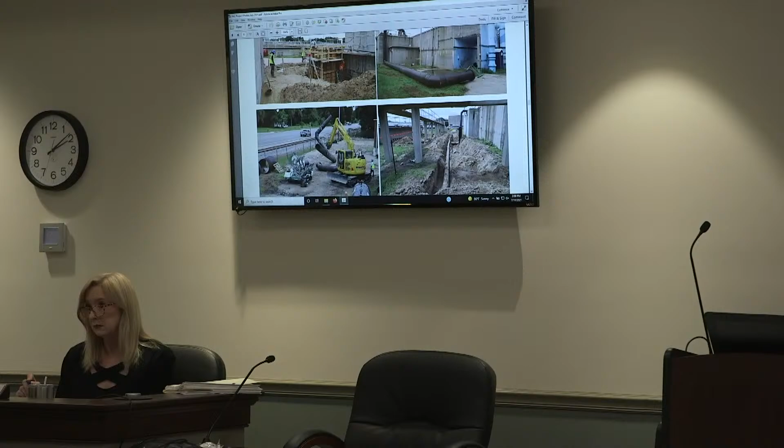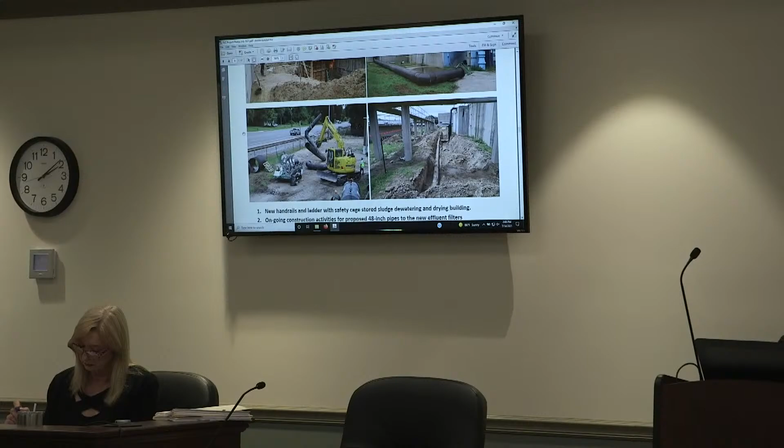They have started hooking up bypass. I haven't been down there this week, but they should be on bypass for the pre-aeration building this week. They're basically going to intersect - you see in that second picture on the right, there's some pipes going vertical, there's the pumped influent water. They're going to disconnect those pipes and tie them into the HDPE and bypass that structure so they can begin demolition. They unfortunately had to pull the plug on the influent sections done in advance of the storm, so they've got to go back and plug those new sections so they can come back and coat those manholes that were installed and do a little cleaning. But we wanted to make sure everything was as open as it could be for the storm event.

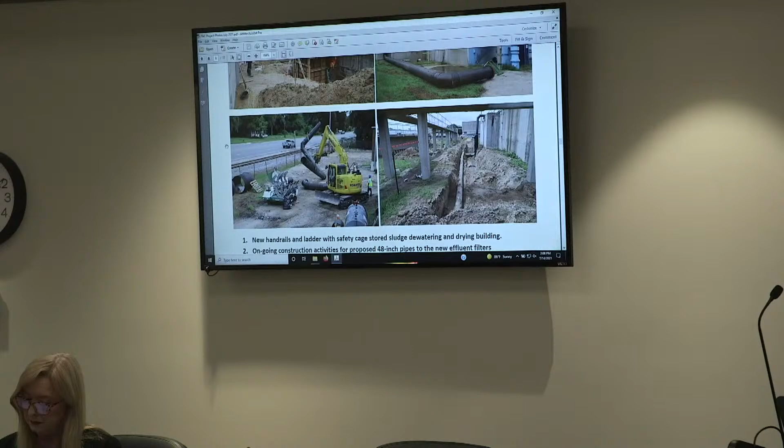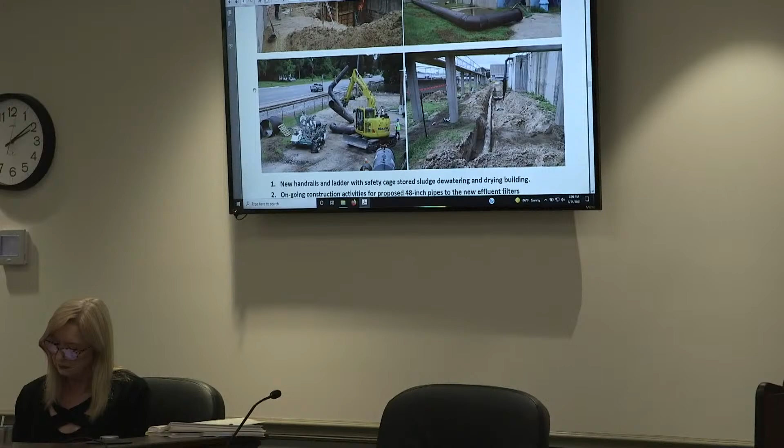And they've been working diligently on some of the RAS interconnections. They've gotten one of the RAS lines piped in correctly now, and they're still working on the other ones. According to the contractor, they're actually running two to three weeks ahead of schedule at this point. Last week was a bit of a lost week with the storm, but still looks like we're moving forward, and the filters were actually delivered about a month ahead of schedule as well.

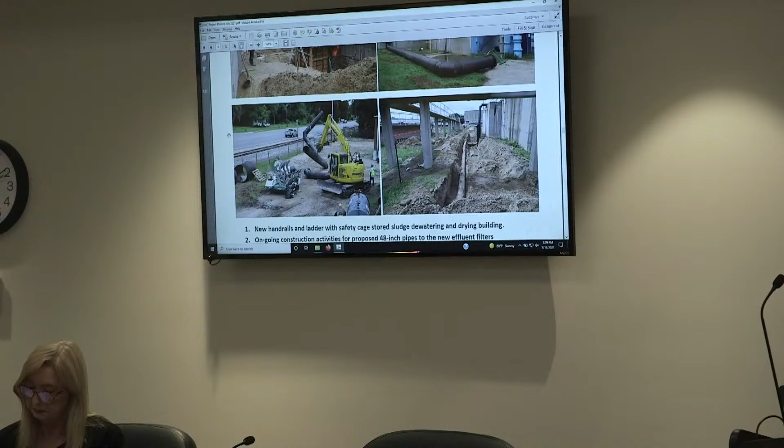So all of the HDPE, that's just temporary pipe, that's bypass piping, yes sir. We don't have any exposed HDPE pipe. No sir, everything on site is actually ductile.

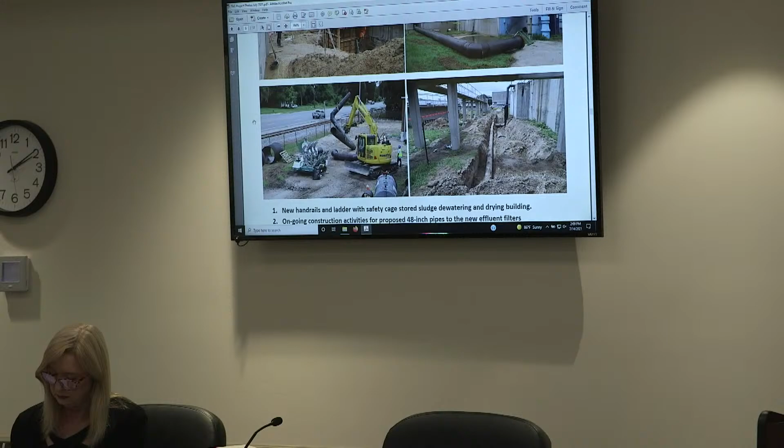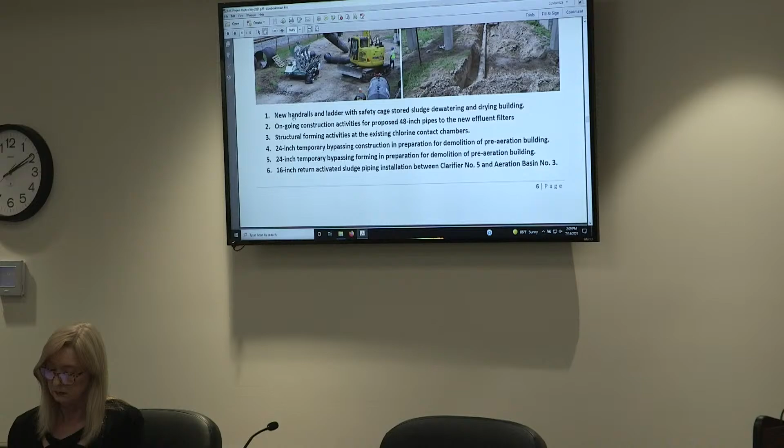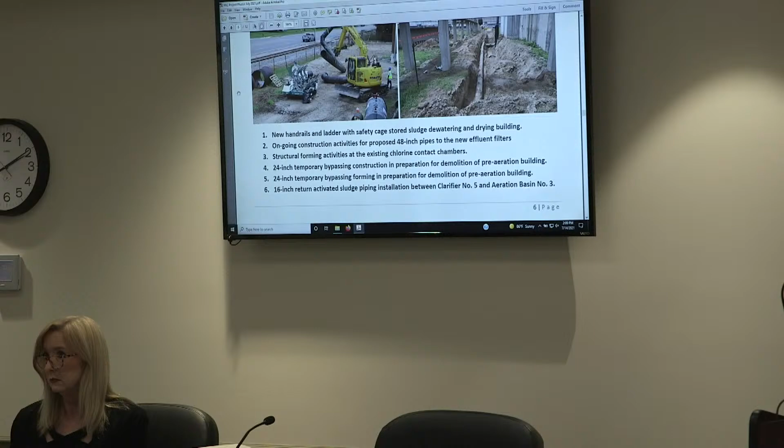Talked at GAWP in Savannah with suppliers of our other major equipment and tried to get them to nail down delivery dates. They're all reporting everything's on schedule. Still looking at screens being delivered in September and odor control around Thanksgiving. Screens are probably the number one item staff is looking forward to getting online, but those are still scheduled for September delivery according to our Vulcan rep.

Talk a little bit about 4105 and 4107 upgrades, which also includes the 4036 basin CIPP. A little confusing, but it's part of that project to accommodate the 4105, 4107 upgrades.

The downstream gravity sewer, we're doing some CIPP lining of that. Notice to proceed on the lining section was actually last Tuesday, so they should be mobilizing for the clean and televising portion very soon. So clean and televising the first portion, then they'll give submittals on liners that we'll review. Those are ordered, and they'll have to sign those off.

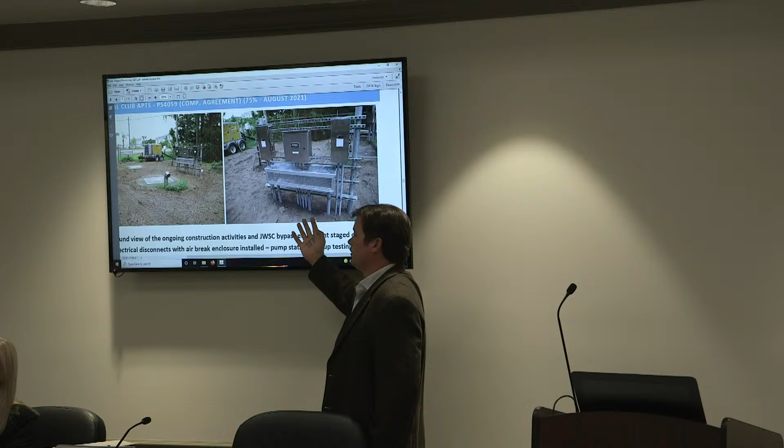Southern Civil is preparing to do a startup next week. If you look at the picture on the right, that's one of the air gap assemblies we developed and designed in-house, the configuration of it. It's what we're including on pump stations now. What it does is take all the conduits from your transducer cables, your flow cables, your power cables to your pumps, all that.

Formerly, these conduits would be routed almost directly into the control panel, and then some type of duct seal would be put in there with hopes of keeping that H2S gas from getting inside. Duct seal doesn't always work correctly, so what we came up with was an air gap. Air gaps work pretty well. It creates a break in the conduits so there's not a direct line of travel for those gases to make it into the control panels and eat them up from the inside.

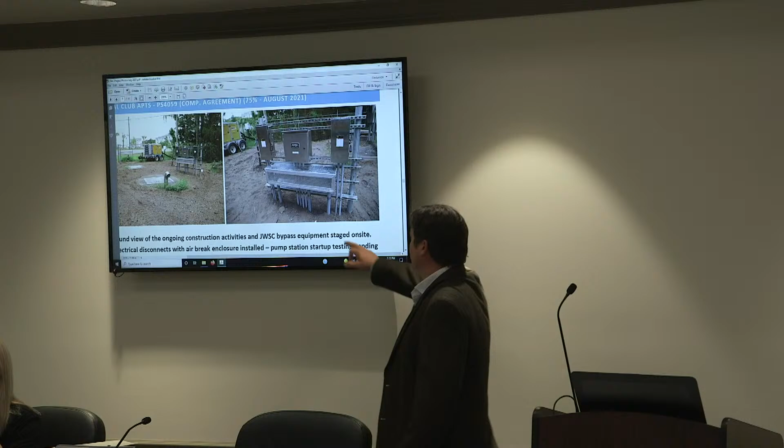So does H2S come out in that box? Yes, it just releases into atmosphere. This type of assembly is what you'll see at Ford - when the temporary goes away, you'll see something very similar.

Have we patented that? Not yet, we'll get Charlie working on that. What's the deal, at universities the university gets all the credit in the patent, right? Does that work with us the same way?

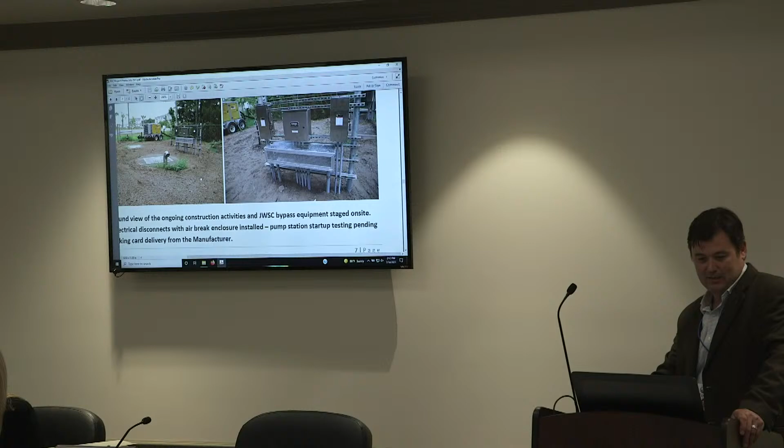Anyway, so for 59 we're looking for a startup there. Once that's done, once that project's over, that'll conclude our comprehensive agreement with Coastal Club. That will be finished.

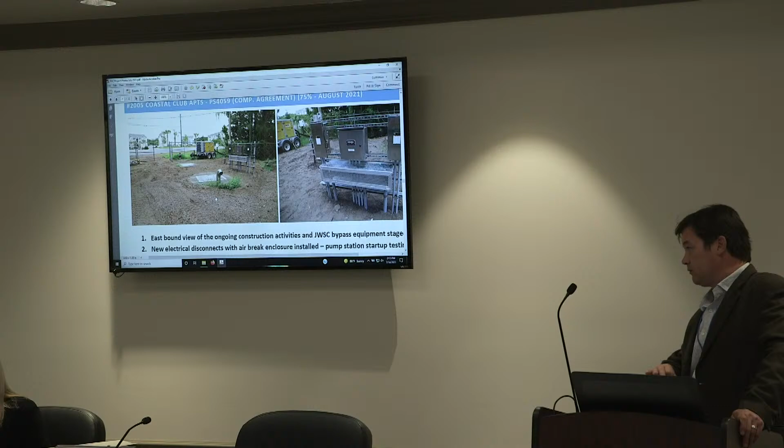Bergen Woods Offsite Force Main, another comprehensive agreement with a private developer, Bergen Woods off of the spur. Apartment complex transformed into a townhome complex. Their concept moving forward is not individually owned units - one owner, one large parcel, so we're actually back to a master meter on that project.

Working through it, waiting to receive the design change back from them. Also waiting to get their capital fees so we can execute the contract and move forward with our folks. My understanding is we should be receiving those this week. Can't wait to get that force main underway.

Good news on that one, seeing the supply chain issues - as soon as the board voted to approve or award this contract, we talked with the contractor and they agreed, and having seen it was pretty official, they went ahead and ordered materials. 8-week lead time on materials, so hopefully it's going to time out just right, materials arriving in the next couple of weeks, and they'll hit the ground running. This project is also connected to another project we'll touch on, it's in the list - 4116 pump station upgrade at the safety complex.

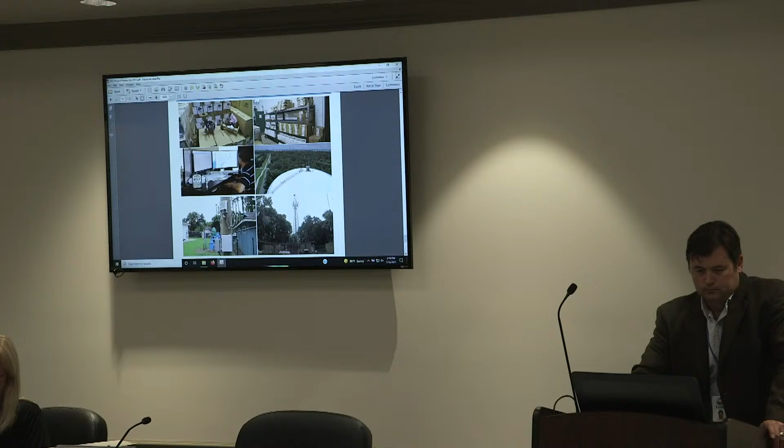All right, meter replacements—I'll let Mr. Burrows cover. Meter replacements are ongoing. We've moved forward with the full auditing of our system to determine all the necessary as-needed items and potentially get pricing from our supplier and contractor with more official quantities. We've installed over 4,000 meters to date, and we're currently working with the hospital on replacing their meters. They're one of our larger customers and certainly cannot be without water at any time, so we'll coordinate those large meter replacements with them.

Those meters, to my understanding, have been delivered. We're just going to get that coordinated, and luckily we have a member of our commission that can help us out with coordinating all that. That project is moving along. We have about 900 meters to date that have been in the ground for 15 years, and we've got to go dig them up and find them because they've been reading just fine, but we can't find the box right now. So staff is going out there with a metal detector and a probe rod trying to locate meters at this point, but we are working through that process right now.

In the case of a customer needing to access the meter base or meter box, to put a cutoff on there or something like that, and they can't find it, we do go out and locate it for them if people call us having issues finding their meter location. Depending on the reason, it may not be same-day service, but we will go out and locate meters for them. A lot of them our staff is already familiar with, so it's not a tedious process to find them. And you can always look for the W in the concrete to give you a heads up. We do several of those a year where people are trying to find their meter, either to check for a leak or to install a cutoff.